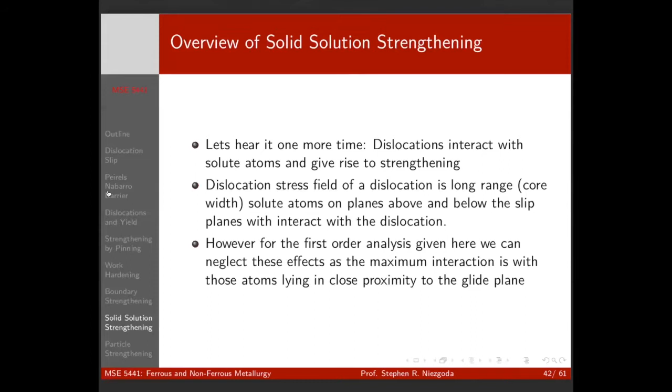So we can think about this. If we put in a small solute atom here, it causes a lattice distortion, but that lattice distortion is symmetric about this solute atom. So we're going to call it a spherical distortion. It's sitting on a lattice plane. And this is a weak obstacle.

And let's consider we have an edge dislocation here, and there's a slip plane and a small, slightly smaller than a small solute atom sitting there. So this interaction here, the interaction energy here is going to be negative. Because we have a state of compression up here, and a small solute atom is going to relieve that compression. The atoms aren't going to be quite as confined when there's a smaller atom in that extra half plane. Does that make sense? Just geometry. Okay? So this dislocation is going to be attracted to this region here.

But what if this small solute atom were directly below the slip plane? What if it were one atomic plane down? Now we have atoms in a state of tension because they're too far apart. And if we put a smaller one in there, that's going to make it worse. So that edge dislocation now would be repulsed from that if this solute atom were simply one atomic plane lower. What about if this were larger? It would be repulsive in this state, but attractive if it was one down. Everyone okay with that? No major issues?

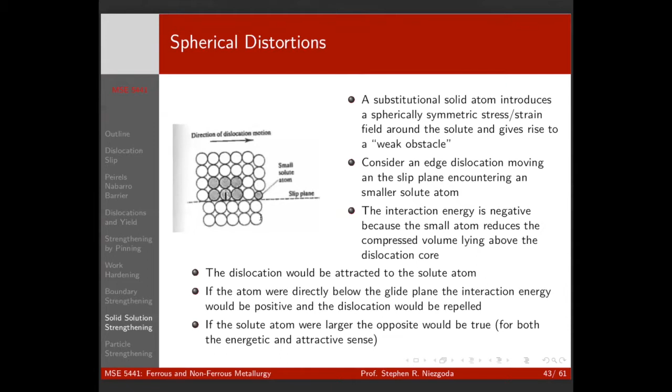Just geometry. Okay, so how does this give rise to strengthening? Because on average, if we just stick with smaller for a second, the atoms are distributed randomly throughout our matrix, and we don't know a priori where the dislocation is going to come in. There's just equal probability that it's going to be either above or below the slip plane. So those attractive and repulsive things should balance out.

So how does that give rise to strengthening? So we're talking about substitutional solid solutions.

And according to the Hume-Rothery rules, the size difference has to be within 15%. So the size difference doesn't seem like such a big difference for there to be much of a drive. But 15% is big, right?

So think about elastic strains, right? A 15% change in size gives you a bond stretch divided by 2 on equal sides, so that's 7.5%. That's sort of an upper limit of stretch. That's pretty significant, right? So small differences in size can still have a pretty big effect,

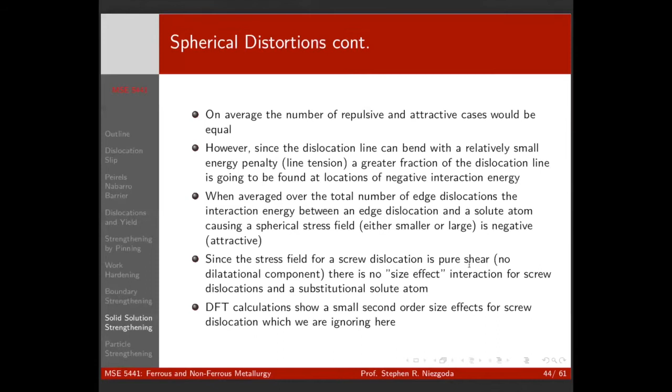Okay, so those are for what we call spherical distortions. Some point defects are what we call tetragonal distortions. The important tetragonal distortion we'll talk about is a carbon atom in BCC, which is interstitial. Interstitial in BCC gives you a stress field that isn't symmetric, and those are very hard distortions.

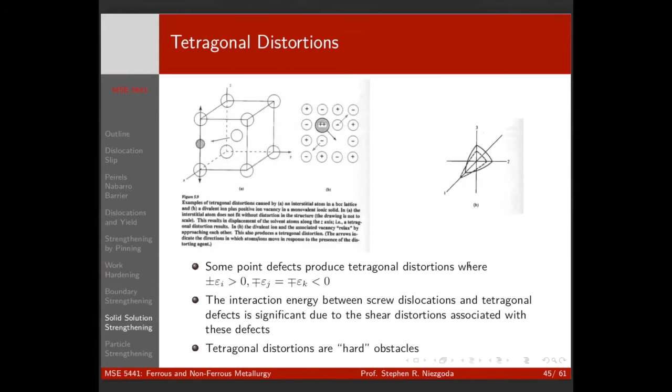Nitrogen and niobium, interstitial oxygen and titanium—these are the sorts of things that cause the size effect to be much stronger because of the geometry of the crystal. We'll talk about those more as they come up in the individual systems.

So how big of an effect is it? Well, if we can define a strain-like parameter that gives you the difference in lattice parameter per unit concentration of having the solute in.

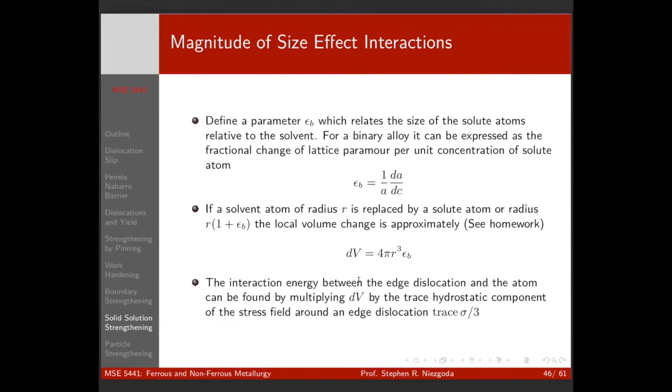And you can see that it goes as the radius of the matrix cubed, times the strain parameter. That just sort of gives you a magnitude for it.

And so if we substitute all this in, we get something—this is our energy for edge dislocation: R cubed, the parameter, the angle between the slip plane and the atom makes over the distance, and then Poisson's ratio is in here. This is like your dislocation core width terms, and this is the general form. So the big thing is GB times this strain term—that's the important bit.

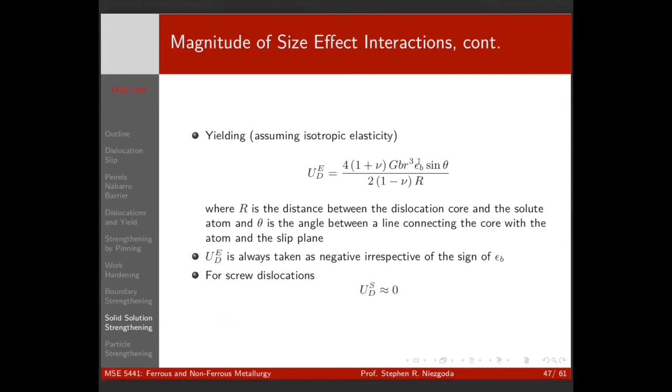Okay, so we also have, I mentioned on Wednesday, we also have a modulus effect. Remember the energy of a dislocation is GB squared.

So if your dislocation gets near an atom where the bond stiffness between the solute and the matrix is different than the matrix, you're going to affect the energy of the dislocation in that region because your bond stiffness is different. So we saw the size effect is always a negative interaction. If we have a compliant solute, that's also going to be a negative interaction, but if we have a stiffer bond, that gives us a positive energy.

Because we're, when we talked about size effects, it depended whether you were coming in under or over, and it was a statistical argument about the dislocation wanting to be away from positive and towards negative, right? But if you have a stiffer atom, it's always positive everywhere, right? So you're going to have a destructive energy, right?

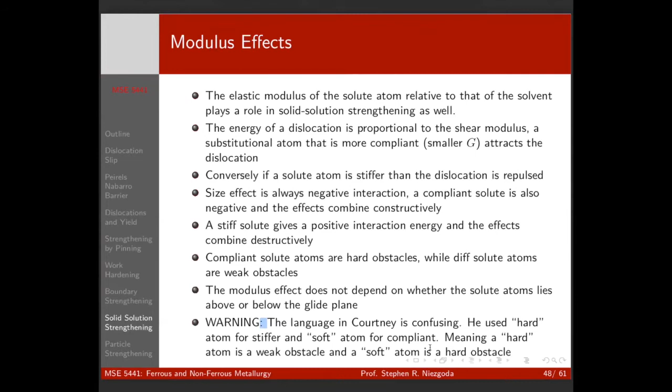Right, but the magnitude of it is basically going to be a strain-like term, which gives you the change in shear modulus per unit of solute concentration. So this is a dimensionless term that is like strain. And it's going to be proportional to that, and the Burgers vector squared, and the radius, and the distance squared. So it's a 1 over r squared term. So it's a much shorter range effect than the size, right?

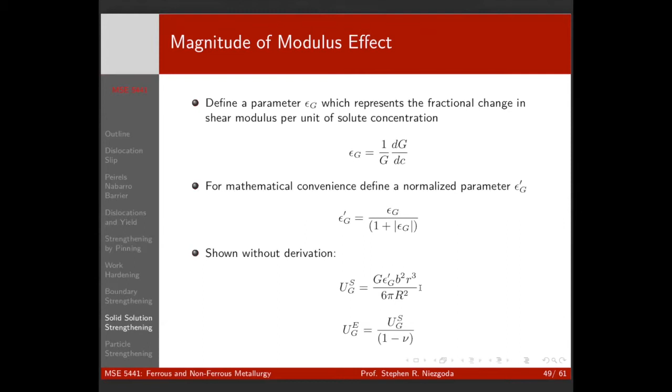And it's always going to be constructive rather than destructive, right? So the idea of what you want is if you have an optimal strengthening solid solution, you would want an atom with as big of a size difference as you can so that you don't get phase separation, right?

And you want your solute atom, your alloying element, to have a lower elastic modulus than your primary element, right? Which is fine for steel and titanium. You can't quite get that for aluminum, right? Which is one reason why precipitation strengthening aluminum has more precipitation strengthening elements or alloys than solid solution strengthening alloys, simply because you can't get a big bang for your buck because you can't take advantage of the modulus effect as well. There's also a lot to do with the solubilities of alloying elements.

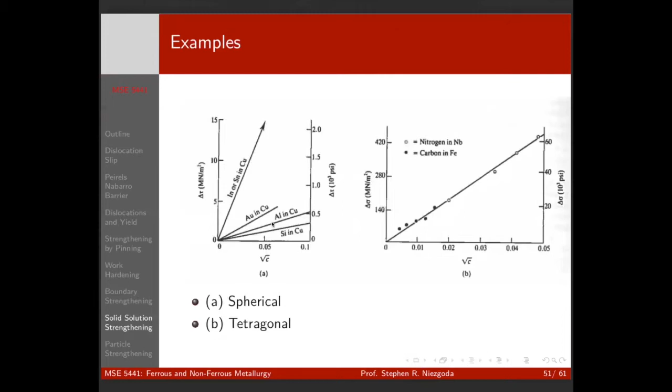And so this is just one reason why precipitation strengthening in aluminum is very important, right? And this just shows you examples of the magnitudes that you can get out, and the difference between, say, carbon in iron gives you a much stronger effect than direct substitutional because of the nature of that stress field. But we'll talk about that more in those particular examples.

So particle strengthening is—just a question. For both the attractive and repulsive, yeah, they both reduce the dislocation movement. Yeah, but attractive reduce more than repulsive.

No, it's the simple fact that when you're talking about the size effect, you always have a mix of attractive and repulsive, because depending on where it is on the slip plane, your dislocation will always seek to find a low energy source, right? Whereas with the modulus effect, you're always going to be all positive or all negative, right? And so the lower the energy, it takes more to cut to move away than to be repulsed, right?

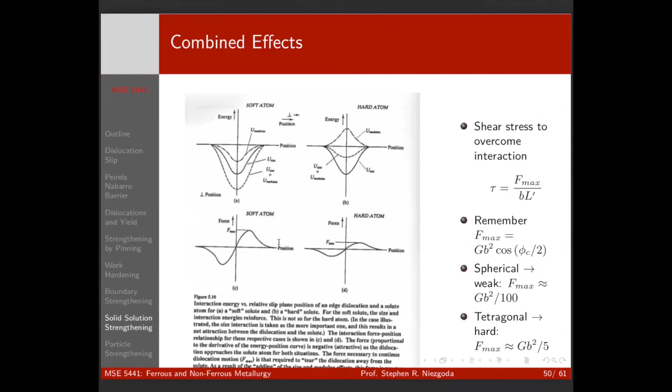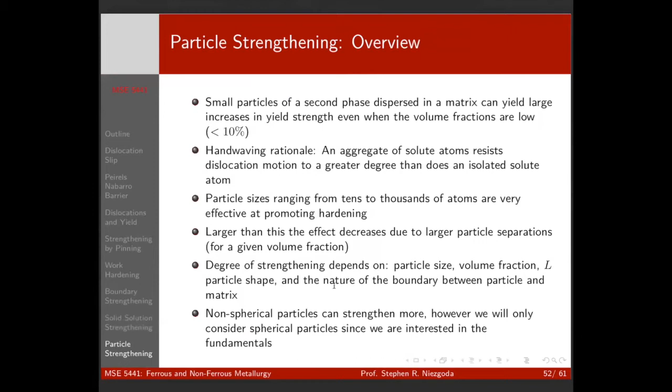So in terms of particles, we want particles that are hard to cut and hard to bow around, right? In an ideal world. So if we think about what that means for a given volume fraction, we want particles that are close together so we can't bow around them, and we want particles that are big enough that they're hard to cut through. So what we want is a nice dispersion of fine particles. We'll talk about this a lot with aluminum.

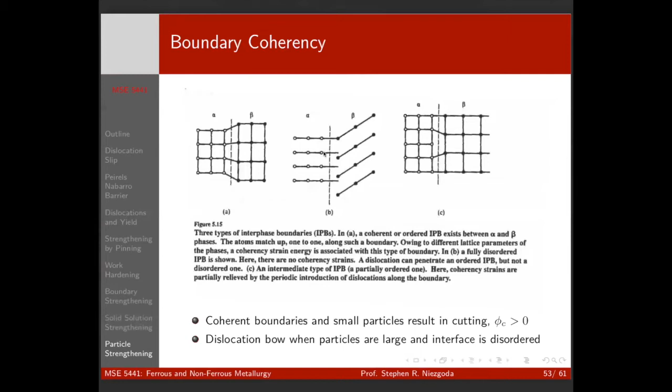We talked about boundary coherency before with interfaces. So in general, a coherent interface is going to be much easier to cut through than an incoherent interface, right? Because we have a nice path, we don't have to change our slip plane, right? When going through, our dislocations are going to come in and interact with other interfacial dislocations, and we might have a misorientation, and we're going to have to change directions, and we have dislocation reactions. So all that makes incoherent interfaces much more difficult to cut than coherent interfaces.

Okay? So we have a couple different effects that come about, right? We have coherency, right, and which is basically what I just said. So you have the interface, we have strain, there's an elastic strain field. Coherent interfaces tend to have a higher strain field. We go through this in the reading. The main thing I want you to take away from this is not how these equations look, right? Just knowing what the effects are and being able to say, oh, that's a small particle with a coherent interface. It's not going to be too hard to cut, right?

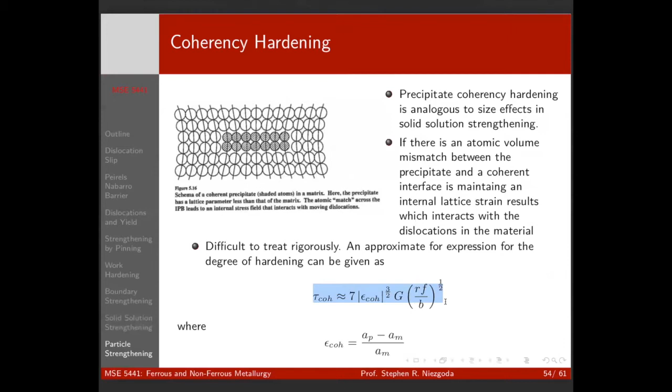We also have modulus hardening, which is the same argument we made before. If I have a particle that has a different shear modulus than my matrix, once the dislocation starts to cut into it, it's going to have a different energy than the dislocation in the matrix. That's going to cause the dislocation to either resist going in or want to stay in, causing a bend. So modulus hardening is the second primary precipitation strengthening effect we have to worry about.

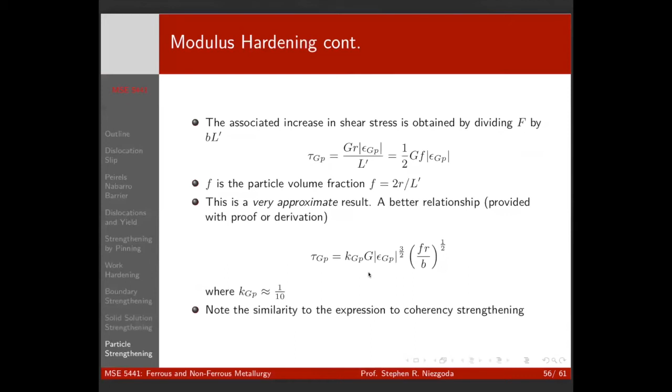For modulus hardening, if the interface is not coherent, we will not consider the difference, because it will generally be much smaller than what you have to pay to get through an incoherent interface. So you can generally neglect it since it will just be smaller. But by incoherent, you really can't cut through it, because the dislocation has been changed by passing through the interface—it's not the same dislocation in the particle as it is on the outside, so it's not really the same thing.

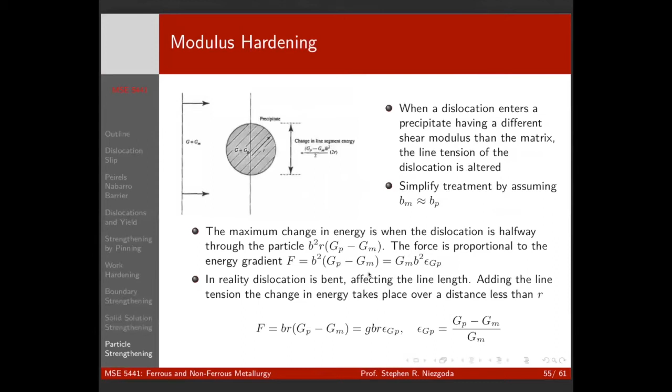For this, we just want to go over general effects so we have a framework to talk about these things. So chemical strengthening is another effect, and this is generally pretty small, at least if only one dislocation goes through.

Or if the particle is very small. Because when the dislocation goes through, we shear our particle and make a step which is now new interface, so there's an energy penalty that has to be paid—the surface energy per unit area of interface. By cutting this, we're making new interface, and we have an energy cost associated with this. If the particle is very large, the amount we're increasing the surface area is very, very small, so it's kind of negligible.

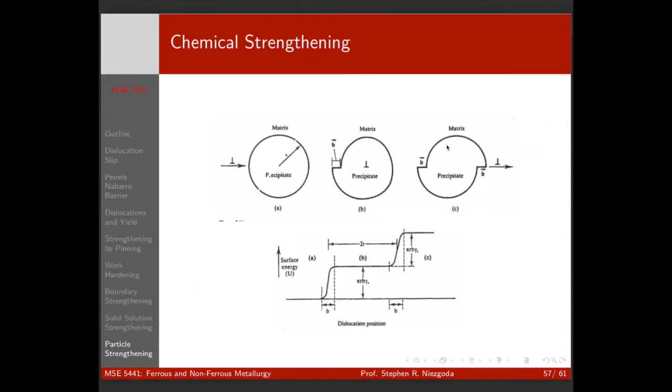But if this is a very small particle, say tens of Burgers vectors across, like GP zones in aluminum that we're going to be talking about, this can be a pretty big effect. Also, if you have a dislocation source, a Frank-Read source pumping out dislocation after dislocation, they're all on the same plane, so generally you'll have a particle cut by multiple dislocations, each one making a step. In that case, you can add a pretty significant amount of surface area. Of course, if you do that too many times, you've destroyed your particle and it becomes softer. But initially, you can create a pretty big increase in surface area.

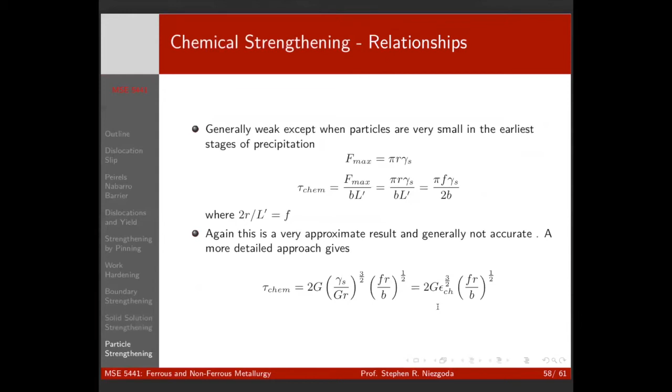And again, it's the same thing—we've got a term, this is the fractional amount of new surface energy that's going to be created. Then we have a really important one, especially important in nickel superalloys: order strengthening. So here we have an ABA stacking sequence, and if a dislocation comes through, now we have a stacking fault.

So we have to pay the energy cost of creating this stacking fault. Of course, if a second dislocation comes through, it'll reorder it. But remember, most of the time we're not talking about full dislocations, we're talking about partials. In superalloys, a full dislocation is a partial in the ordered phase, and if you break that up into Shockley partials, you can get all kinds of complex faults based on the order you pass the partials through.

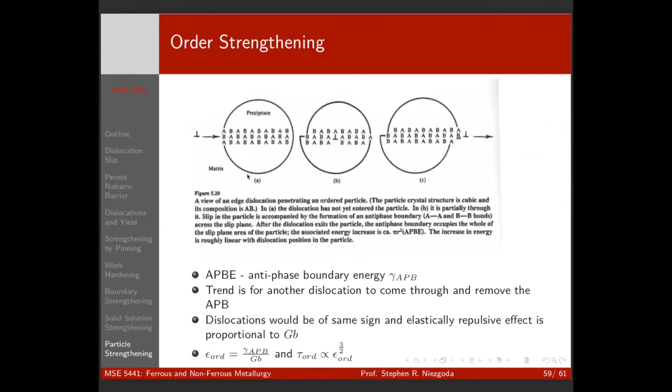So this can be a really big effect, because you pass dislocations through and you're not going to get back to your original layout. But if you just think about a full edge dislocation passing through, the first one will create a stacking fault, and the second one will bring it back.

And then the last thing is non-deforming particles. The analysis for this, for bowing, is exactly the same as it was for our Frank-Read source, except our pinning points are now particles rather than, say, dislocation jogs or a change in the plane.

So the analysis is exactly the same, right? Our effective distance that we're extruding through, that we're bowing through, is the separation of the particles minus 2 radii of the particle. We go through, and then after we bow, we now have 2 dislocation loops left around these particles.

So that effectively makes our distance smaller. So the next dislocation will be extruding through a smaller distance here. You'll have to deal with the dislocation interactions, and the analysis becomes a little more complicated then, because the dislocations will be of the same sign, so you have a repulsion here, and the repulsion force is going to depend on the distance.

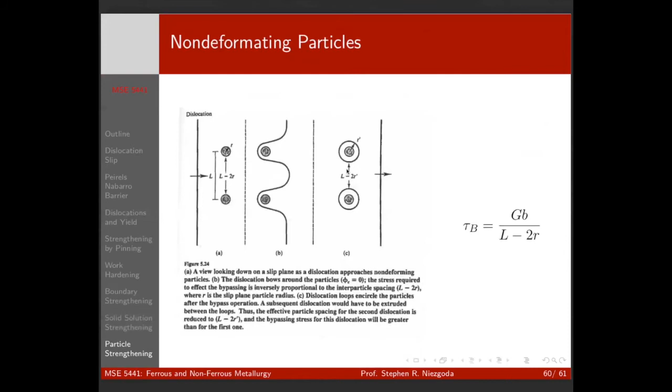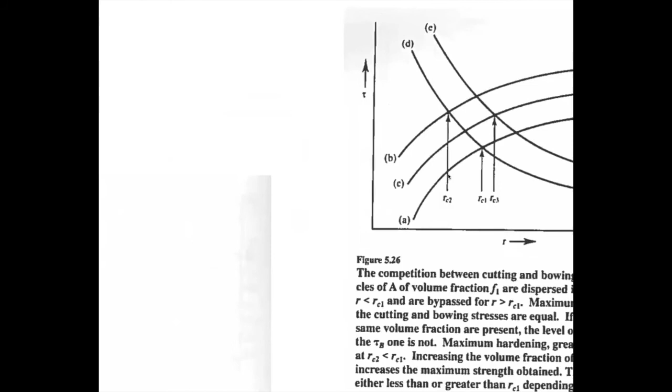Okay, and if we think about this, the general, just sort of, this is the important picture, right? Generally, there's a competition between bowing and cutting. If we keep our volume fraction the same, as we make our particles larger, the separation between them gets larger. This is Ostwald ripening, right?

Which we'll talk about in aluminum as well. As we make our particles bigger and our volume fraction remains constant, our separation between them gets larger. So that means the larger we make our particles, the bigger the space, the easier it is to bow around them. So for small particles that are close, it's easier to cut. Big particles that are far apart, easier to bow.

And the relationships look like this. Our maximum is when the bowing strength and the cutting strength are actually equal, right? That's where we get the most amount of strengthening. Because if we make our particles larger, now bowing becomes easier and we actually have a decrease in strength. If we make our particles smaller, cutting becomes easier and we have a decrease in strength.

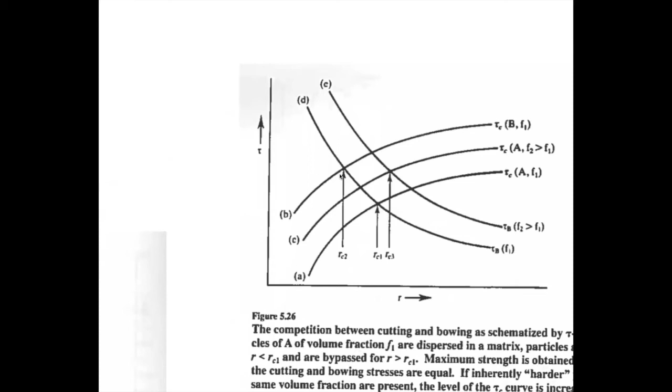So for precipitation strengthening alloys, we tend to call this peak aged, right? When we're right at the balance between where cutting and bowing is exactly equal. And we'll look at a lot of examples of that with aluminum.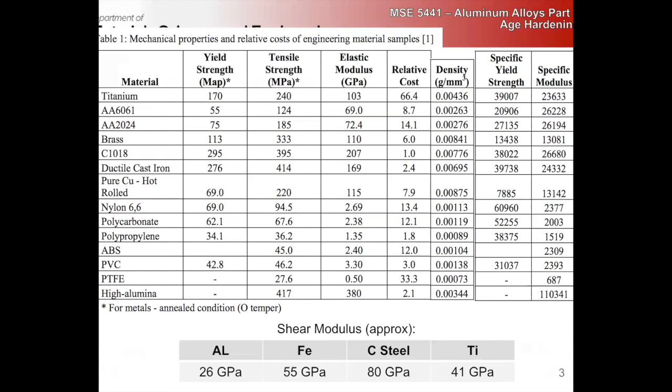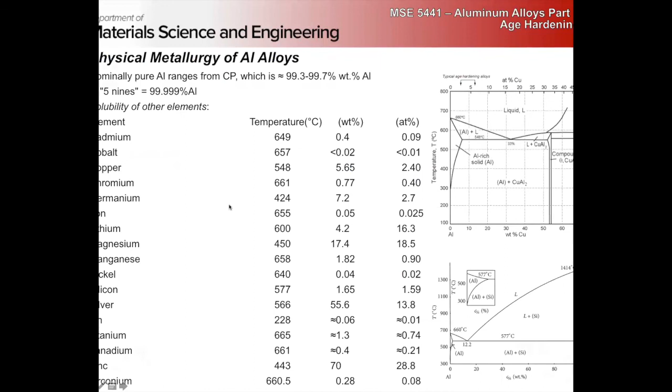I think we will actually stop there for today. We'll get into this - it's interesting, the number of alloying elements that you can use in aluminum is very restricted compared to some other systems, simply because the solubilities are so low. You tend to form lots of intermetallics. So we'll start to discuss that and then jump into our big thermodynamics review on Wednesday. Enjoy the holiday and try not to think about this stuff too much.